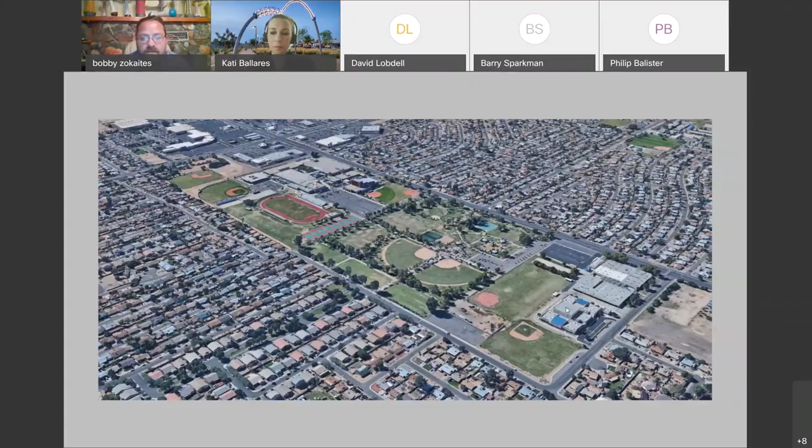So this is another aerial. There's a few other problems or issues with the site. One is this is a maintenance yard for the park right here, and we needed to try to block that.

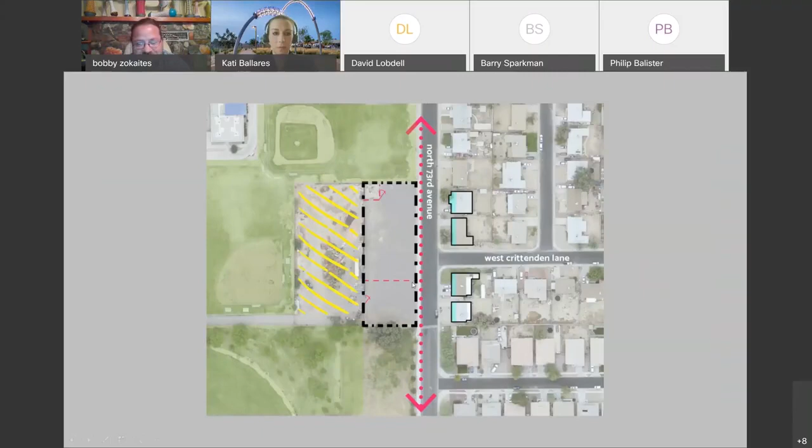And then also this is an archery range — what do you call that — and that's what this little red line is, the right of way for the arrows.

And then here are the existing conditions, what the site was when we started. You can see crushed granite gravel.

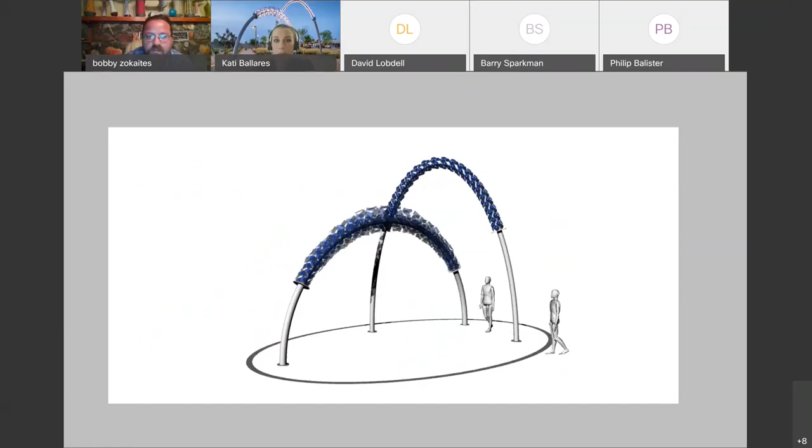So the rest of this is about the process. I was able to make this sketch in my studio for the preliminary designs, and then I gave that virtual model to the engineer and he was able to produce these drawings.

There is a fence that I designed on the site, which is this Art Deco inspired fence. It's got a luminary on it.

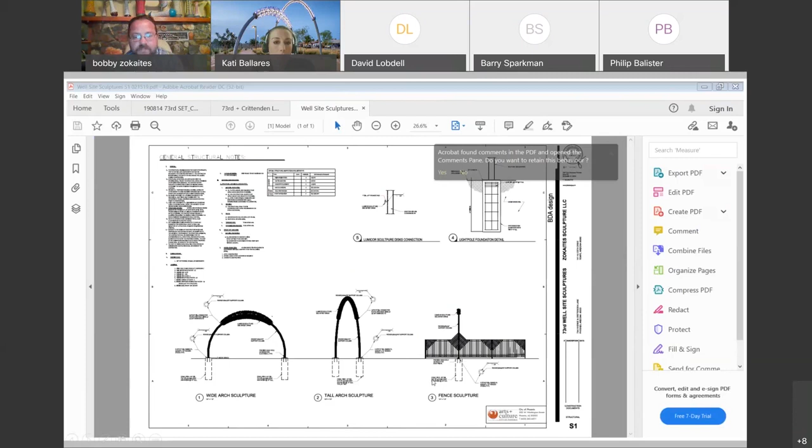And then Dig Studio put together these drawings at that same point. So this is the proposal — you can see here that the fence has this mustache curve, which comes from the street design.

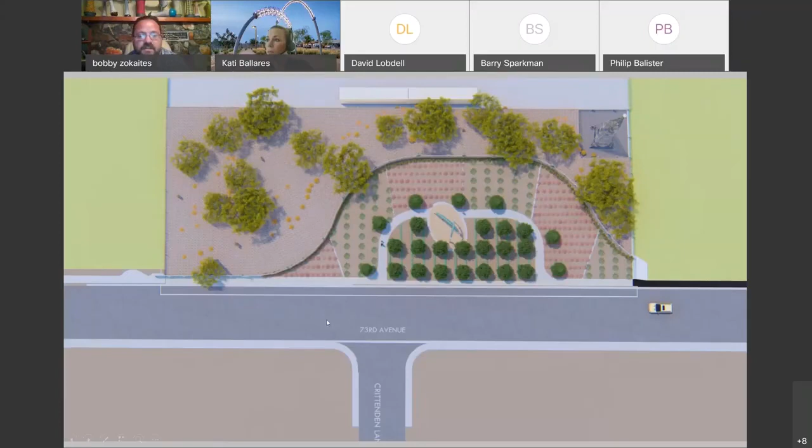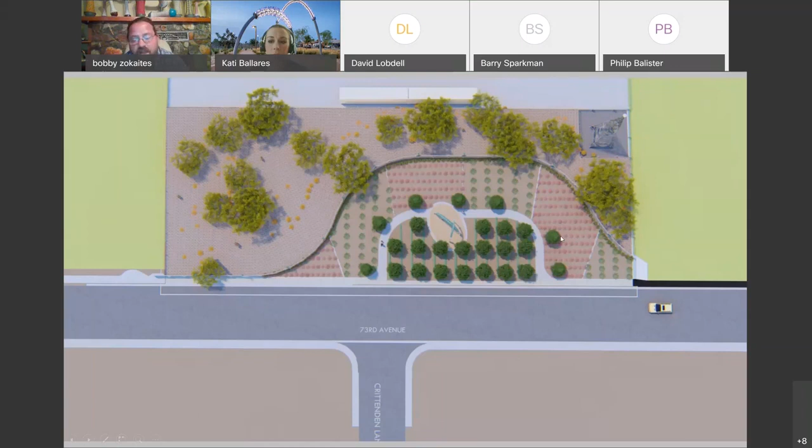We also have different plantings. So we chose to represent the time machine aspect with this area here representing a contemporary park, and then these decorative citrus rows. Phoenix is Phoenix because of agriculture, and this represents the early development of the valley, around the same time that Art Deco was a thing.

So the fence, and then we go into natural desert planting. As you walk this way through the site, you get the history of the last 100 years in the Phoenix Valley.

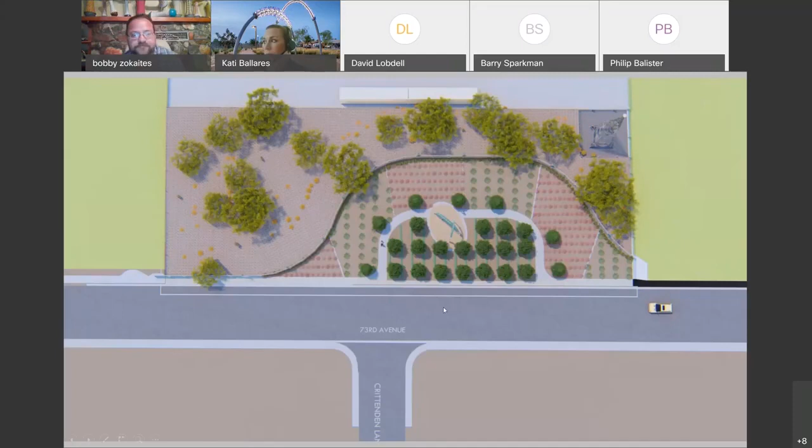And this—I like this rendering a lot. This is after the trees grow up, and they've actually been growing substantially this last year, but the idea is that you'll get the actual time machine sculpture in more of an intimate setting after the trees grow up.

And so then the rest of this presentation is about the build, going back and forth between how many people helped and the suppliers and stuff.

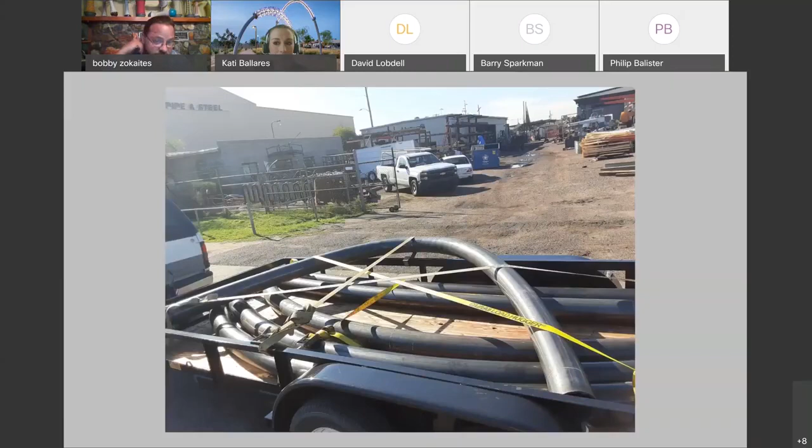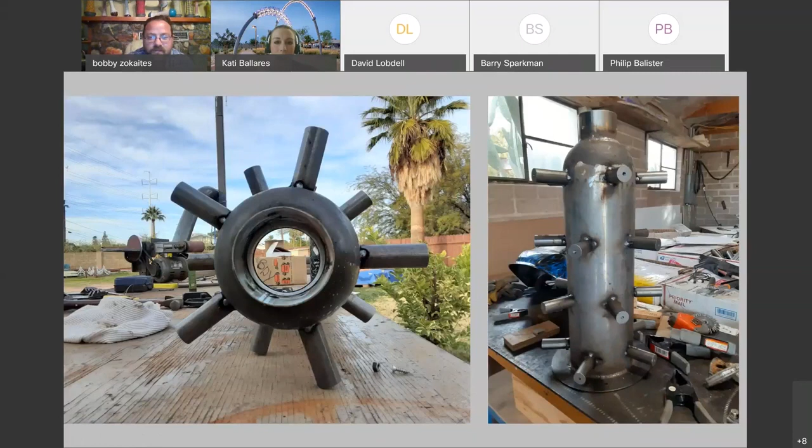This is — you can see I've got jig work here just to get the spacing right. This process to get all of these little tabs on these two sections took about 3 weeks.

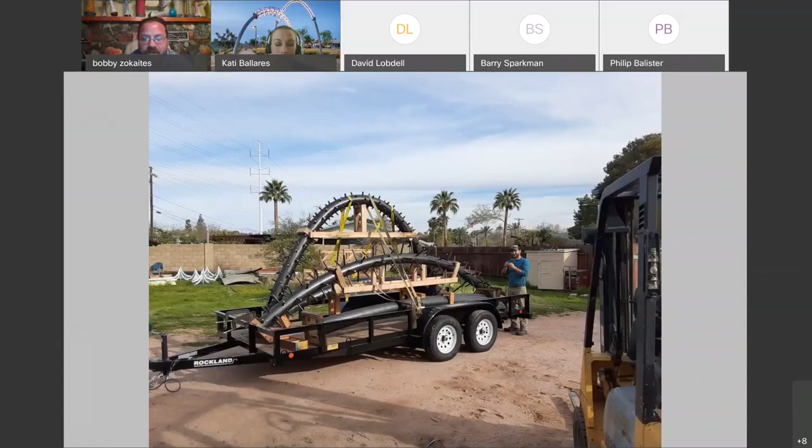This is after powder coating. We made these wooden yokes to make the handling a little bit better, so nobody would bend these stanchions.

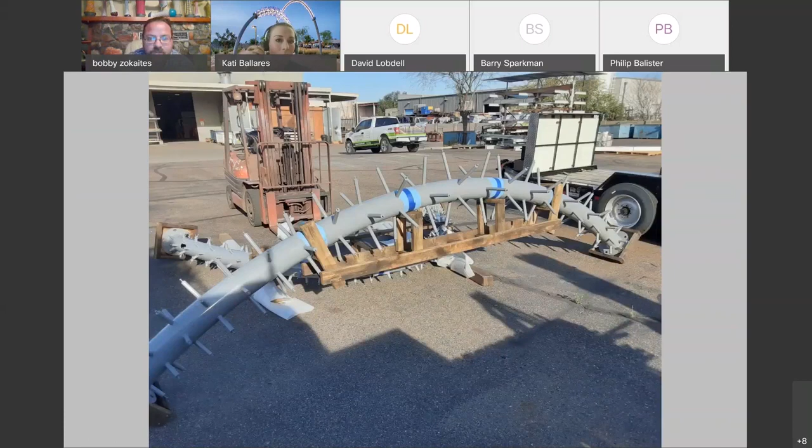It's always a fun day when you get to play with cranes.

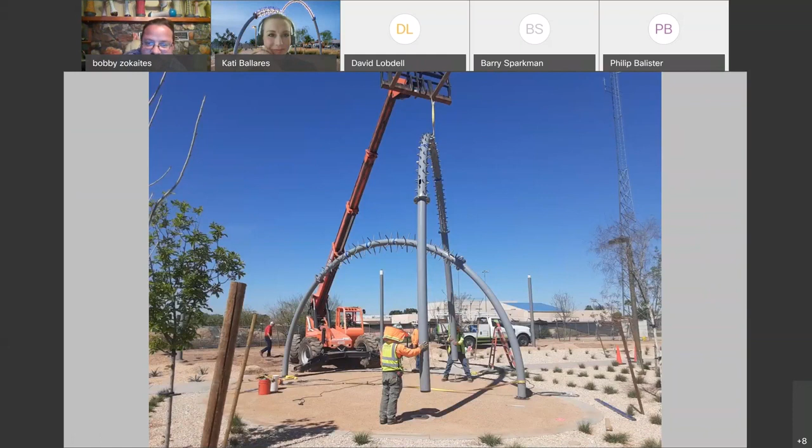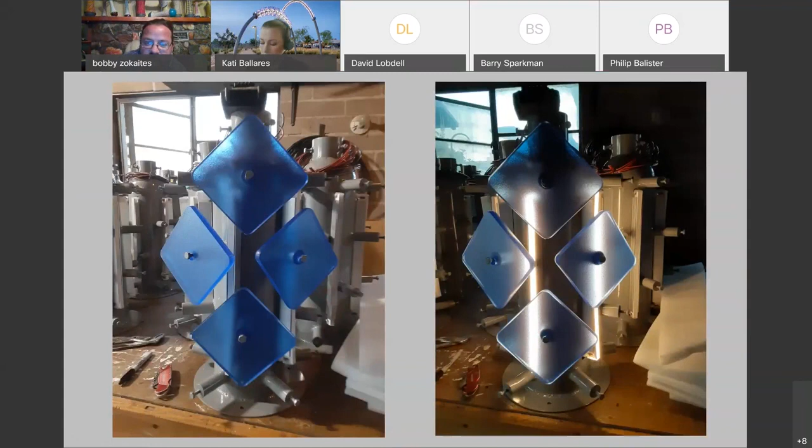We set it up so we don't disturb the neighbors because it's pretty bright. We added these municipal-like prefab light fixtures so that after 10 o'clock at night we can still have the sidewalk lit, but we don't disturb the neighbors with the light from the project. This photograph is from the night that we met to make those decisions. This is the lights at full power, which is pretty cool.

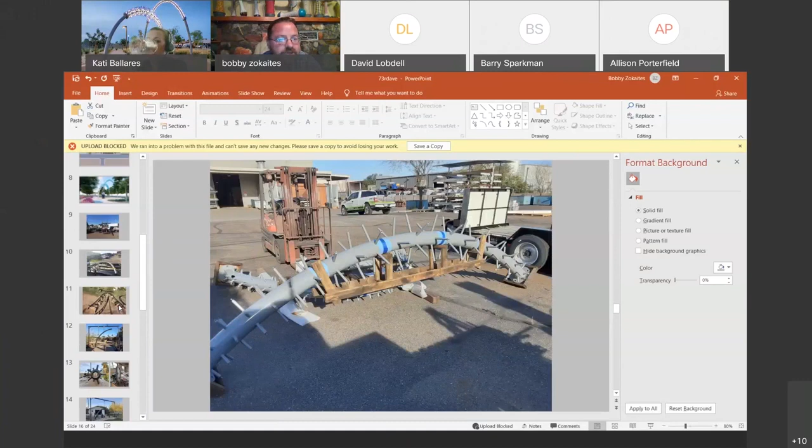So I got my early training as a large-scale sculptor at Franconia Sculpture Park in Minnesota. And I get a lot of satisfaction from actually making the work. But in this case, the fence line is 450 feet long and required a line every 4 inches. So we decided to sub that out.

And Magnum was the perfect shop to use. They actually started out as a fence manufacturer here in Phoenix about 3 generations ago. And because of that, they have a whole lot of design solutions that I don't have access to. So they were able to figure out the joint between the panels and the stanchions, and they were able to figure out... let me see if I can zoom.

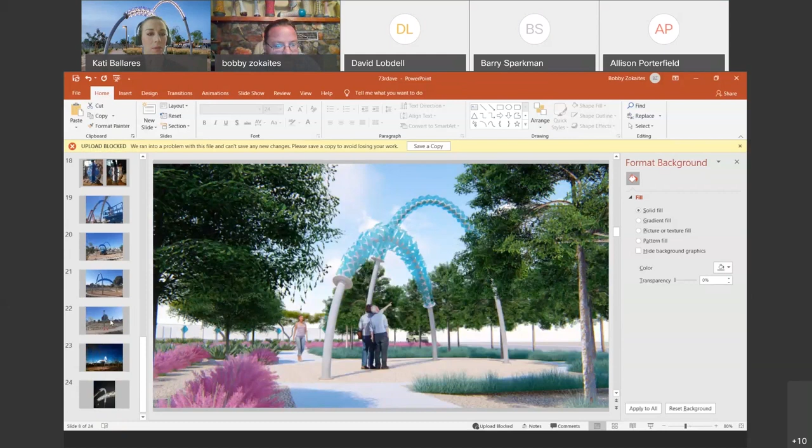I don't actually have a photo of the fence. In these triangular sections here, there is material overlap that would have allowed for corrosion even with the powder coating. So they saw that as a concern, and they actually troubleshot it. So it's a much better product.

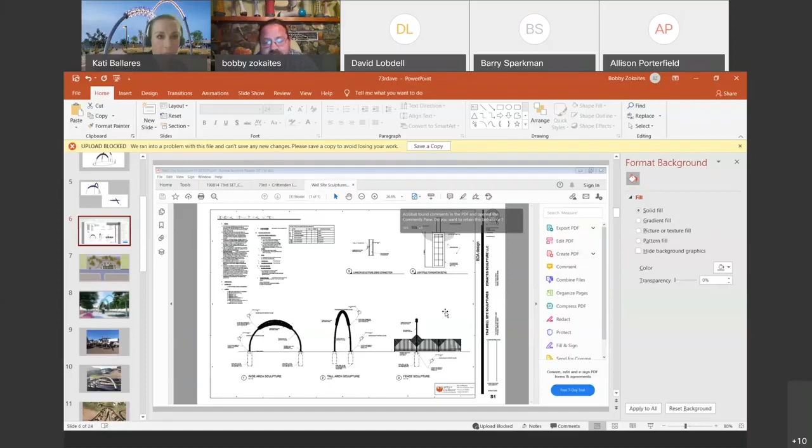And I had a blast working with them because I was able to go sit in with their designers and actually make a lot of those decisions or advise on those decisions. So, yeah, it was actually a pretty fun part of the project, and I didn't have to have the responsibility of making it, which was a lot less stress.

And they also did the powder coating of the arches, correct? I think. Yeah. So what we did was, because it was the first time that I was fabbing a component and they were fabbing a component, we re-merged our manufacturing streams at the point of powder coating, just to make sure the color was consistent across all the metalwork.

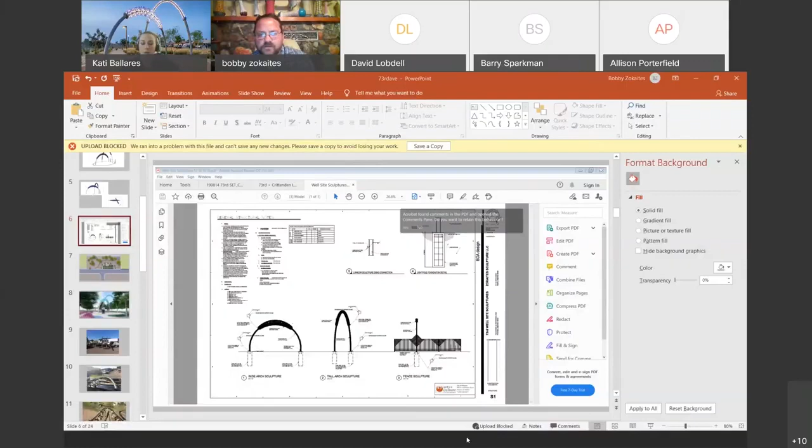So would you recommend them to any other artists to work with? I certainly would. I think they're fantastic. They are absolutely fantastic. I would say they're the best in the valley for this stuff, for sure. Yeah, they're really wonderful to work with, and they like working with artists. They like working on artist projects.